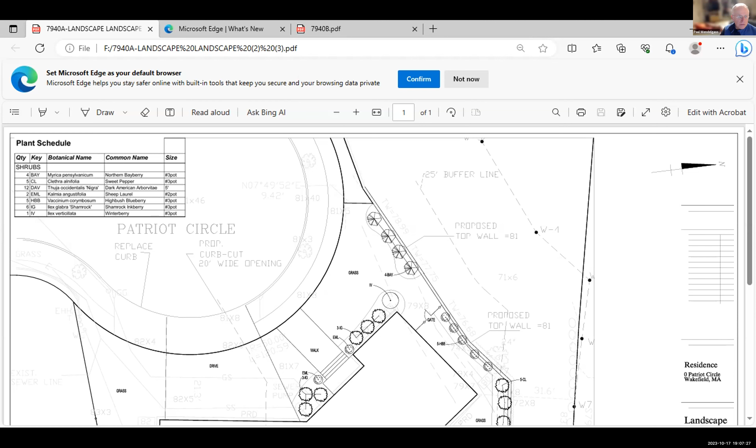And most of those large ones along the wall are arborvitae, Paul? Yes, I gathered that just looking at the quantities. The large ones are the dark American arborvitae - there's a dozen. I think that's all we had asked for, is that right? Yeah, we did that, and like I said, we also reduced the patio size and put in a patio drain that'll connect into the drainage system. Okay, great. Is that a bulkhead shown? Yes, right here. Yes, okay.

Any questions from the commission? It looks like the patio layout might be a little different between the landscaping plan and your proposed site plan. Let me give you a heads up on that - one got submitted before the other and I probably didn't change it. It might be the landscaping plan was amended to change it, because I think my plan comes from this corner of the house, and this one comes from here. Probably this one will be the correct one, but again, it still handles - basically the drainage system handles what we had previously for the entire patio system, which was basically carrying all the way up to this corner of the house. I can amend the plan to match.

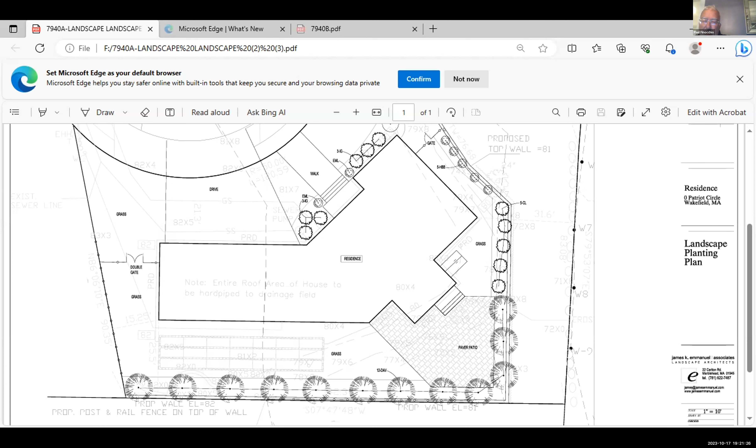Can you ballpark it for me just so I can picture it? If you stood in the back of your property and looked at the retaining wall from where the cul-de-sac is, off to the right heading towards Zametti's property - yep - it'll probably be the same height as that wall. Okay.

So about the height of the existing black chain link that's there right now? Yes, except where it starts to slope down, we'll be raising that wall up to match the same height as the existing wall to the right, heading towards Zametti's property. Okay, thanks. You're welcome.

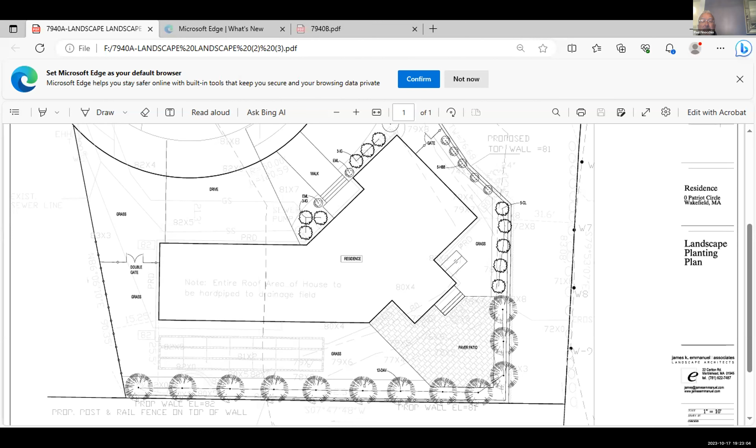I don't know if we'll be talking about an order of conditions, Paul, tonight. Okay, so no need to hang on. I appreciate it, thank you very much. All right, thank you, Paul. Take care, have a good night. Good night. Thank you, guys, have a good night. Thank you.

All right, so just a reminder, I did announce earlier that DEP 313-632, 60 Farm Street, that's the new Wakefield High School, has been continued at the applicant's request. So if there's anybody here for the new high school, it has been continued at the applicant's request.

The original agenda also had a discussion about a tree removal for 391 Vernon. That will not be discussed tonight. If there's anybody here for that, the tree removal at 391 Vernon will not be discussed tonight.

All right, next up, I do see other business, holiday meetings scheduled. Rebecca, is that something you wanted to talk about now? Sure, just noting that the next meeting is on November 8th. It's a Wednesday, not a Tuesday, due to Election Day.

And then I think I sent out for you guys the potential November dates, but just going over that again, the second meeting in November would be the 21st. And then after that, which would be the Tuesday before Thanksgiving, right? That's right. Okay, and then so December right now, we're looking at December 5th and December 19th.

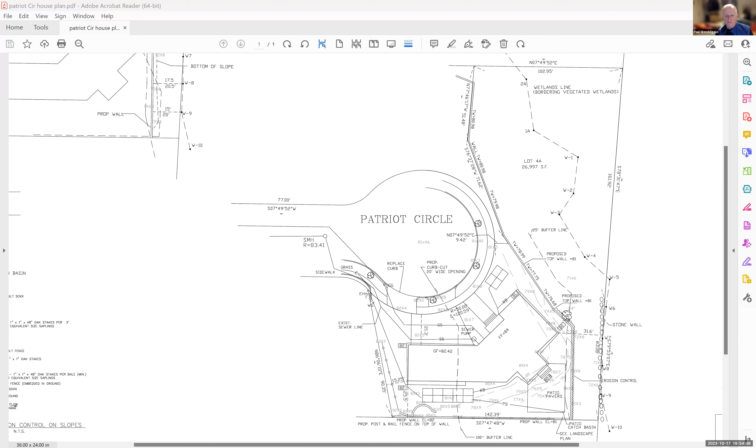Especially if they're just going to plant and put in soil amendments and mulch, it's probably fine. We're still pretty far there too - W4, 5, and 6 is probably more than 40 feet. W7 is 31 feet to the corner of the house, but only about 22 feet off the wall. Point taken though. I'll probably have a gate there with a couple field stones, so I don't know if there'll even be grass there anyway.

In retrospect, that area, the original patio paver area probably made more sense to leave as patio pavers instead of reducing it and having that little grassed area in back. So you'd rather see more paved? I thought we cut it down last time - we didn't want the paved, so I cut it back. We did, but we also didn't have the drain at that time for the pavers, I don't think.

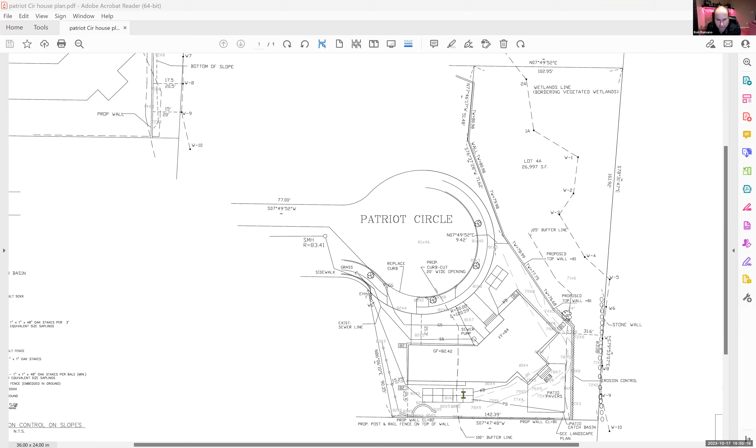Here's the landscape plan now. I think that's probably 17 feet from the bulkhead to the corner of the house - I believe that room is 17 feet, so it might be 17 feet right there. I don't know the depth, but just for perspective, it's 17 feet from the bulkhead where it meets to the end of the house. I think Rebecca's suggestion kind of makes it clean.

I will do whatever you guys like. I'm not really crazy about grass, it's a lot of work. I don't talk to my lawn. It's green this year because of the rain, but I'm not the guy out there talking to it every day. I'm not the grass whisperer. Yeah, agreed.

All right, Rebecca, you good on that one? That actually sort of takes care of 46 and 47. Yes.

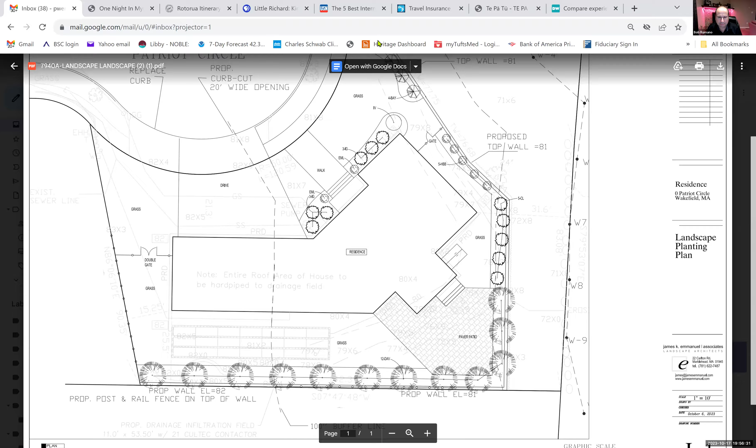You want me to bring up the conditions again? Those of us that don't have photographic memories have no idea. No plowed snow stored within blank feet of the wetland - seems like that's probably non-jurisdictional, since the driveway is well outside our jurisdiction. I can delete it. Same thing for 49, unless you're planning on using salt on your back patio or something. Absolutely not.

Steve, I got a question for you - I should have asked before but I'll ask now. Are you putting pavers in the back, in the backyard? Yes. Are those ones you're going to put the poly sand in between? I haven't decided yet which ones. I wasn't sure, I know we just got to the drainage point right now.

So you want to - does it block the drainage between the pavers? It won't go through the pavers with the poly sand, the poly sand is like a glue, and it stops the weeds from coming through. Basically it turns your pervious surface into impervious. I don't care, I'm just saying - can you say that one more time? Sorry, you broke up a little. Do you want the sand with the sealer, you're saying?

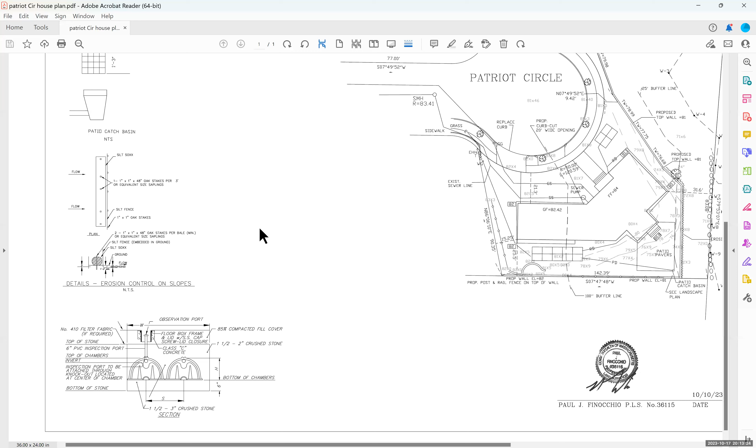In this case, they show a detail on their plan, which we're approving. Let me switch it. So you can condition something on top of what they show on their plan, right, Rebecca? It could have a detail of a construction, and if you like it, you don't have to mention it because they're doing it. Or you could say, in addition, install this if needed.

Yeah, that type of thing. I think that you're not asking for—I mean, all it's saying is that you're going to do what you say. I think it makes perfect sense. I mean, your erosion control detail on the drawing that they gave us, so yeah, I think it would be. I think it looks fine. I don't see anything wrong with it.

And my point was only—I was just quibbling over the grammar, but everyone knows what it means, so I'm not too concerned about it at all. Okay, all right, so Rebecca, I think you got your legal opinion. It's a-okay. And also, I have an edit, which is I'm going to delete 'and or limit of work,' and I'm going to add the word 'marking' after the next sentence, the limit of work.

Do you agree with that, Rebecca? Which part, as shown on the approved plan, or the grammatical changes? The grammatical change, I think it's fine. No, six of one, I think either way.

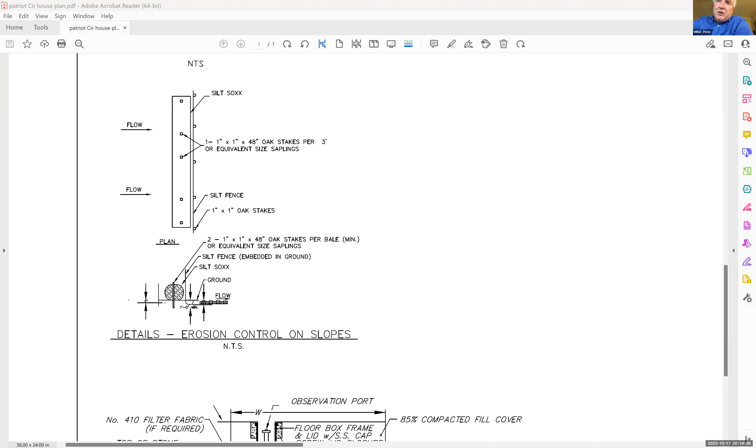Yeah, it's fine, everyone knows what it means. Yeah, I'm happy to change it. Or if you guys aren't going to have a problem with the language as written, let's not even bother with it. I'm also really comfortable with referencing the approved plan.

Because there's a potential you could run into a conflict where their detail is different than what you cite in the conditions, and they'll be like, okay, which one do you want me to do? Better to reference the plan. Yeah, I think that's right. You reference the plan, all of these are easily tackled.

I think none of them are really that big of a deal, and from the experience I have, I haven't come into too many problems with either one. I do think referencing the plans should be the basis for what they do. They're going to do what they submitted.

We have the as-built still on the standard order? I think so, believe so, yeah. No, I don't have a standard order up anymore, but I'm sure it is. Even if you didn't, I think it's required. Isn't it required by DEP now too? I can't remember, but I think you do.

Yeah, it's in number 43 for the certificate of compliance. They have to submit a cert from a registered PE that the construction complies with the order, and two sets of field surveys, as-built site plans. All right, perfect, and post-construction photographs.